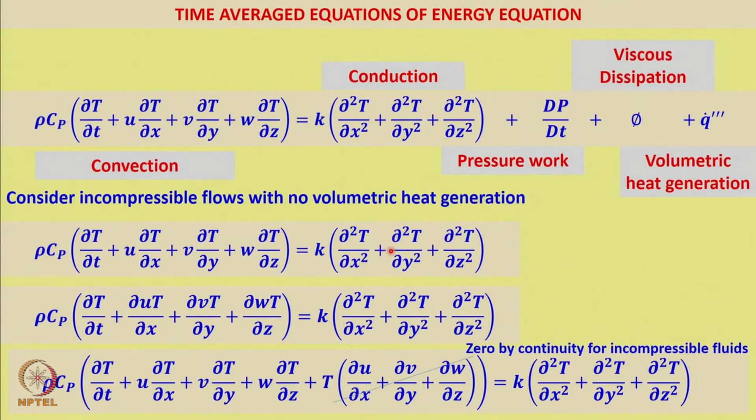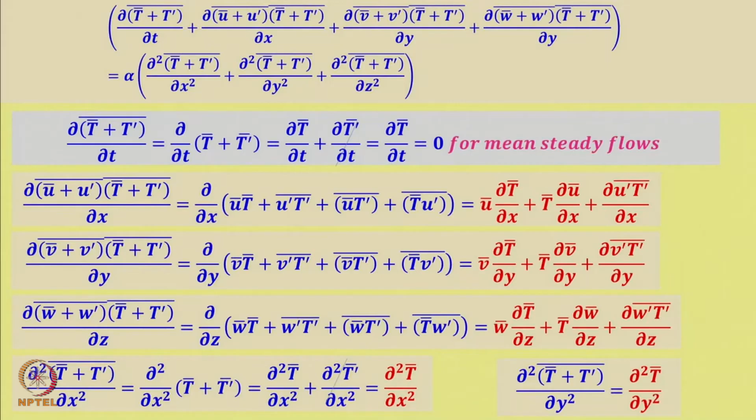Coming to the slides, this was the general energy equation, in which we neglected the pressure work, viscous dissipation, and volumetric generation. Pressure work and viscous dissipation were neglected because the flow was incompressible, and volumetric generation we have also neglected. We rearranged these terms, did the Reynolds averaging, followed various steps, took the components, decomposed them into mean motion and fluctuating component, and wrote all those equations, time averaging them to get these terms.

So when we time averaged, we ended up with these additional turbulent stresses. If I write all of these equations, we got 5 equations and 17 unknowns: u bar, v bar, w bar, p bar, t bar, and 12 more unknowns. So this we termed as a closure problem.

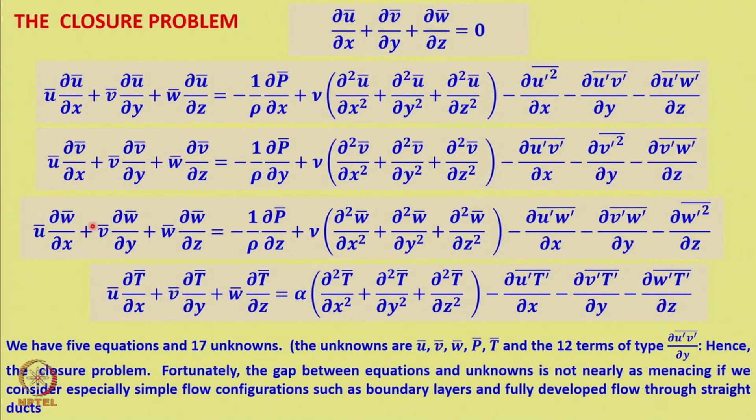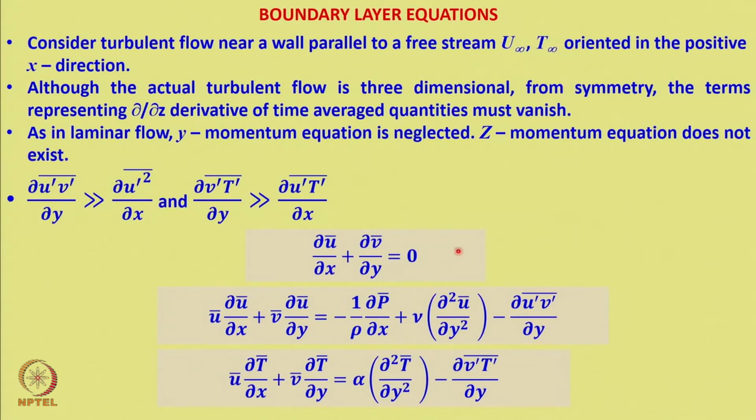To make our life a little easy, we took up boundary layer equations, that is, considering turbulent flow near a wall parallel to a free stream, u infinity comma t infinity oriented in the positive x direction. Although it is 3-dimensional, we have neglected del by del z derivative of the time averaged quantities, and the y momentum equation is neglected, and z momentum equation does not exist, and higher order terms are neglected, and we ended up with these 3 boundary layer equations.

We introduced here, rearranging these equations, the eddy shear stress as minus rho u prime v prime bar equal to rho epsilon m del u bar by del y, as if it is like nu. For laminar flow we wrote this as rho nu del u bar by del y. So we have written epsilon m, but note that epsilon m is dependent on the fluid flow but not on fluid properties. The eddy heat flux was defined as minus rho Cp v prime t prime bar equal to rho Cp epsilon h del t bar by del y.

So we rewrote this equation as u bar del u bar by del x plus v bar del u bar by del y equal to minus 1 by rho del p bar by del x plus del by del y of nu plus epsilon m del u bar by del y, and the energy equation as u bar del t bar by del x plus v bar del t bar by del y equal to del by del y of alpha plus epsilon h del t bar by del y.

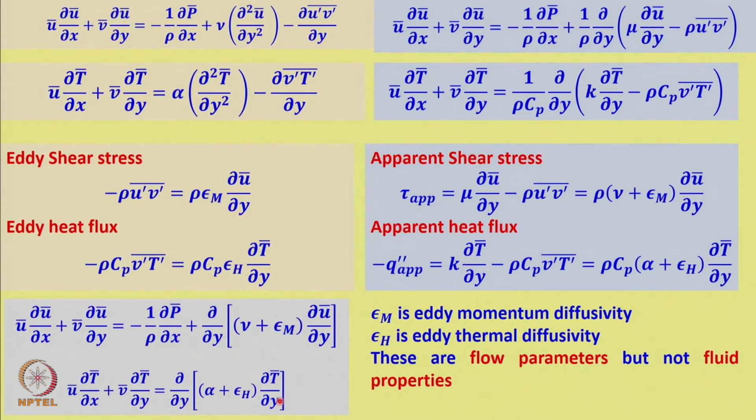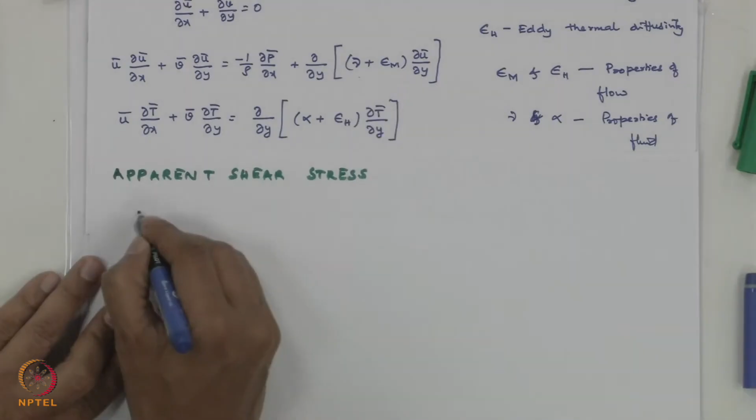I just want to remind you of this by rewriting the apparent shear stress. If you just see these equations, it's just the combination of both viscous and turbulent shear stress, that is, tau apparent is equal to mu del u bar by del y minus rho u prime v prime bar, which is equal to rho times nu plus epsilon m del u bar by del y.

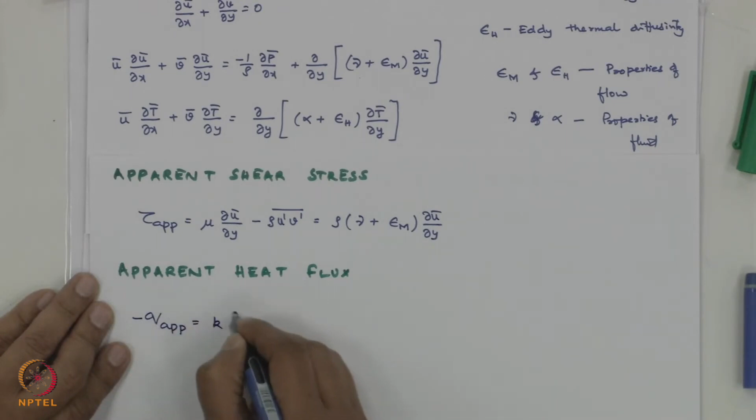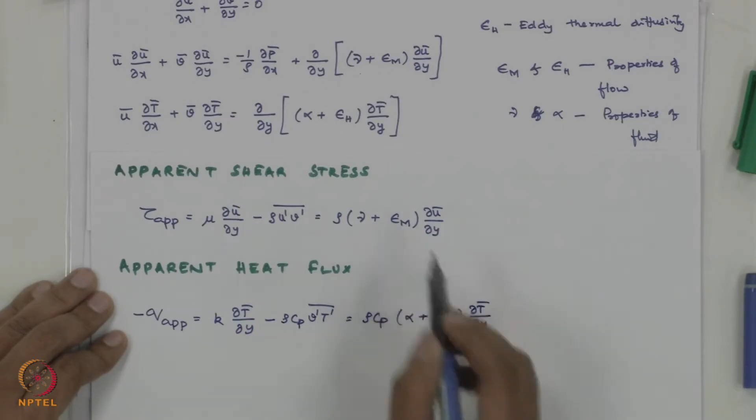Similarly, apparent heat flux, minus q apparent equal to k del t bar by del y minus rho Cp v prime t prime bar, equal to rho Cp times alpha plus epsilon h del t bar by del y. M represents momentum, H represents heat flux. That's how we have defined it, and this is how we can visualize it.

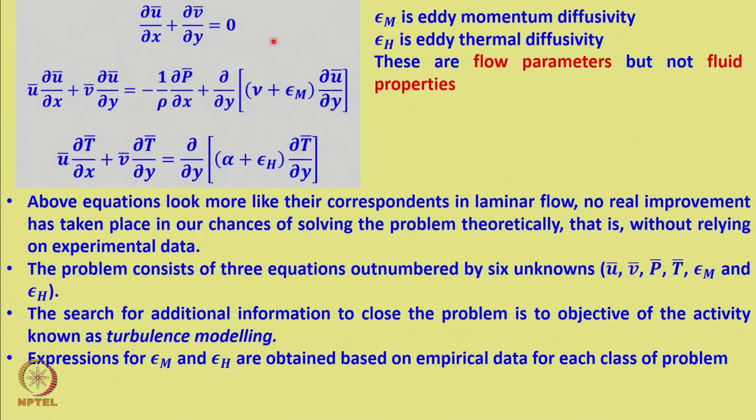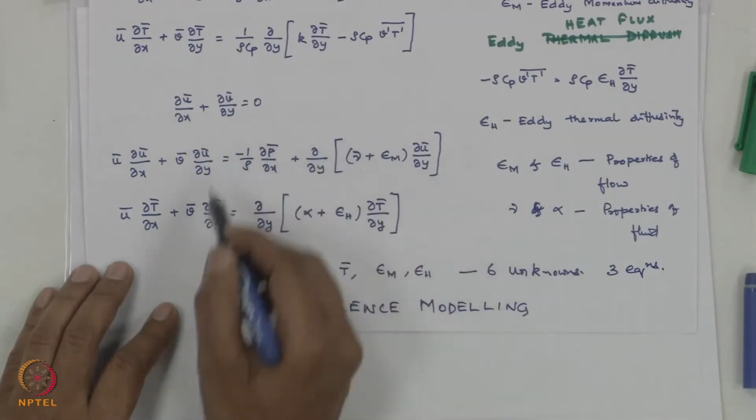So now if we get back to the slides, what are these slides saying? These are the 3 equations we have, as I said at the end of my last module. So you have unknowns u bar, v bar, p bar, t bar, epsilon m, epsilon h — that's 6 unknowns, but we have only 3 equations. So how to close this with these 3 equations? How to find equations for epsilon m, epsilon h is called turbulence modeling.

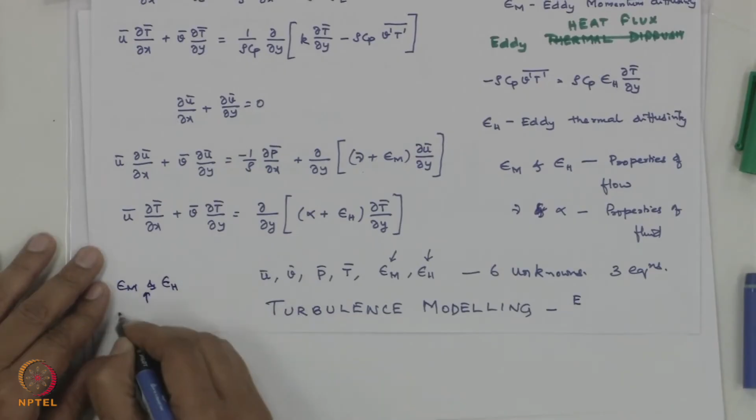That depends on each class of problem. Epsilon m and epsilon h will have different values depending on the class of the problem, that is, whether it is internal or external or jet flows — it depends on that.

So let us get back to writing. Let us take up what is called the universal velocity distribution.

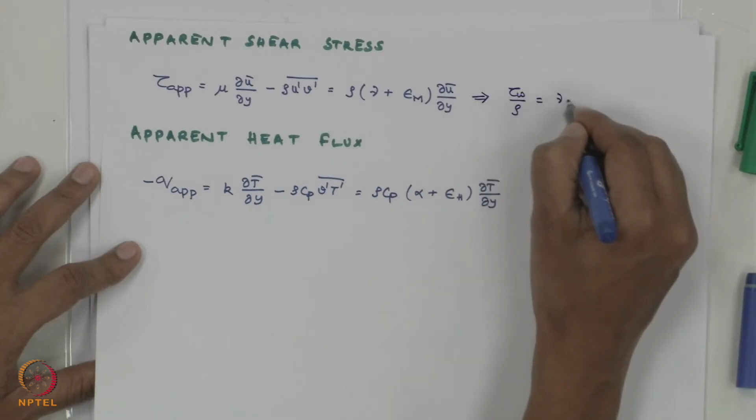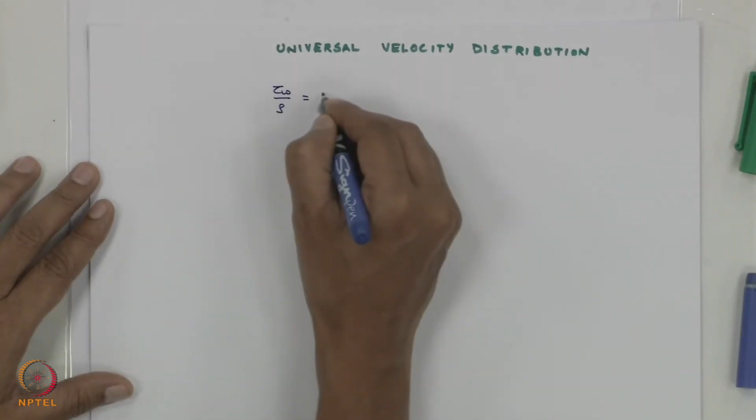Universal velocity distribution. So, this is what I had written: tau apparent equal to rho nu plus epsilon m del u bar by del y. I am replacing this, so tau wall by rho equal to nu plus epsilon m del u bar by del y. So I am writing that here: tau wall by rho equal to nu plus epsilon m del u bar by del y.

Now if you recollect, tau wall by rho has units Pascal per kg per meter cube, which is Newton per meter squared upon kg per meter cube. Newton can be written as kg meter per second squared into 1 by meter squared kg per meter cube, which reduces to meter squared per second squared. That means tau wall by rho is recognized as frictional velocity. Yesterday we called this u tau equal to square root of tau wall by rho, and this we called frictional velocity.

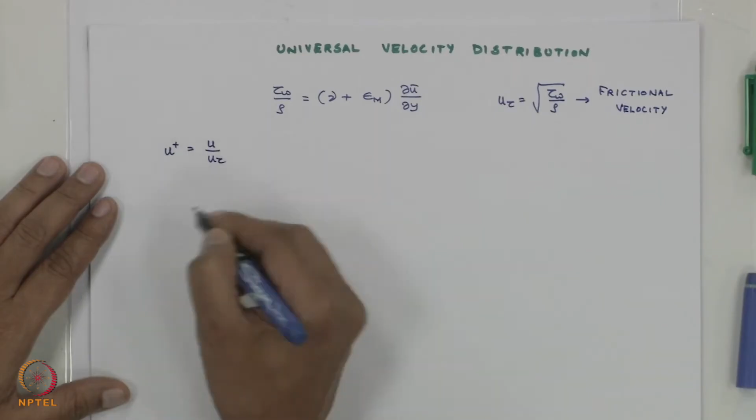Now I will rearrange this equation in terms of u plus and y plus, that is the aim. So let us recollect, u plus was written as u by u tau, and u tau equal to square root of tau wall by rho, and y plus equal to y u tau by nu. This is what we had written.

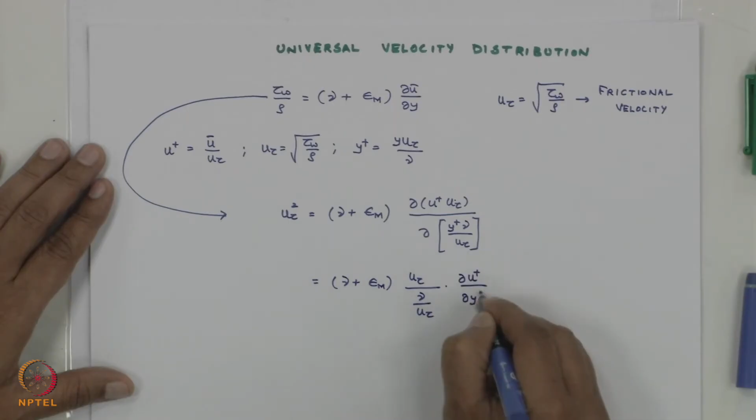So now left hand side of this equation becomes u tau squared, since tau wall by rho equal to u tau squared equal to nu plus epsilon m. For u bar, sorry, u plus is u bar by u tau, I had missed that bar. So u bar can be written as u plus into u tau, so del of u plus into u tau upon del of y can be written using y plus nu by u tau. But u tau and nu are constant, I can pull them out. So nu plus epsilon m into u tau by nu by u tau into del u plus by del y plus, and this is u tau squared.

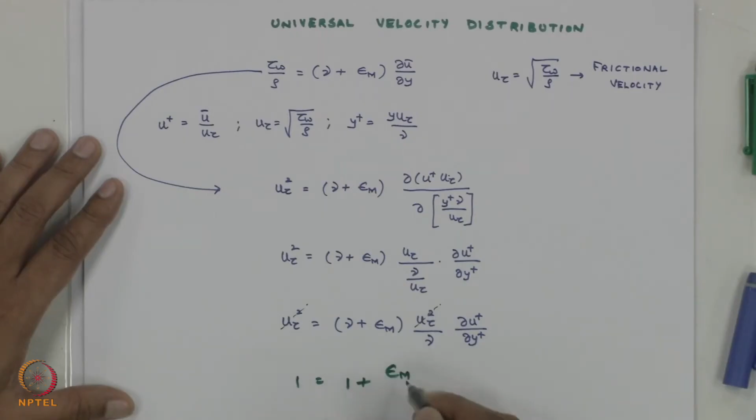So if I rewrite and rearrange, u tau squared equal to nu plus epsilon m, u tau squared by nu, del u plus by del y plus. The u tau squared cancels out on both sides, and if I divide by nu, left hand side becomes 1 equal to 1 plus epsilon m by nu, whole bracket into del u plus by del y plus. So this is my basic equation.

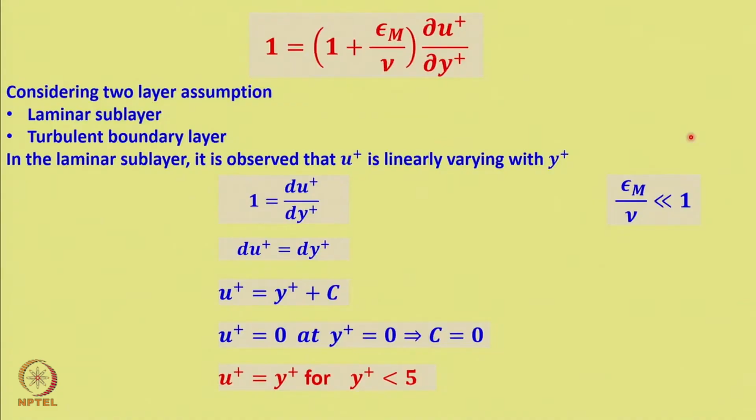So let us take up this equation and consider a two-layer assumption. In the two-layer assumption we have the laminar sublayer and the turbulent boundary layer. I will not consider the buffer layer here, I will take only these two layers: the laminar sublayer and the turbulent boundary layer.

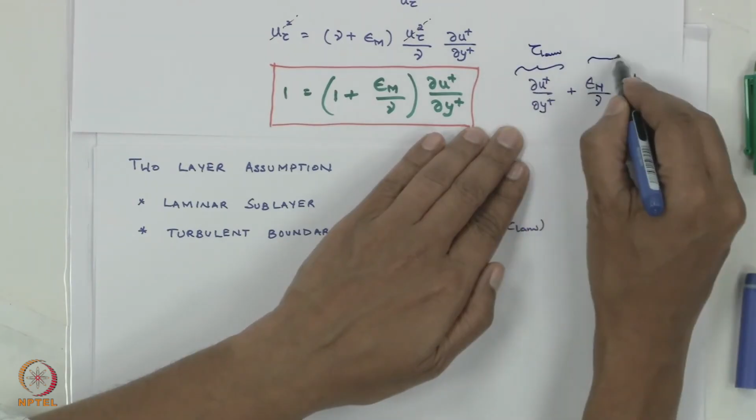So in the laminar sublayer, as you can recall, tau laminar exceeds tau turbulent, and in the turbulent boundary layer, tau turbulent exceeds tau laminar. So in this equation, 1 equal to del u plus by del y plus, plus epsilon m by nu del u plus by del y plus — the first term is tau laminar and the second is tau turbulent. So in the viscous sublayer I can neglect this turbulent component, since tau laminar is greater than tau turbulent, which implies 1 is equal to du plus by dy plus.

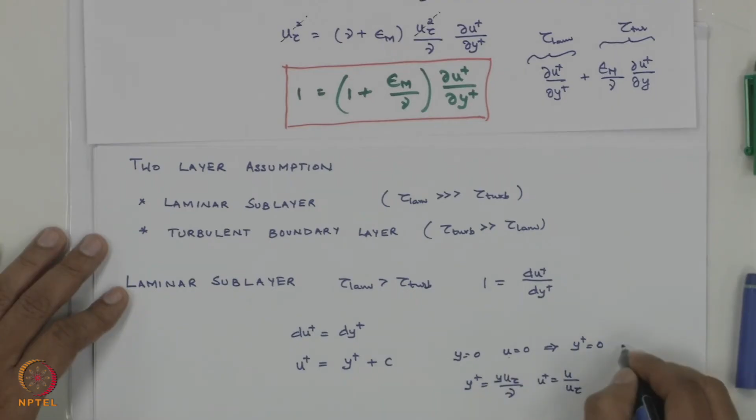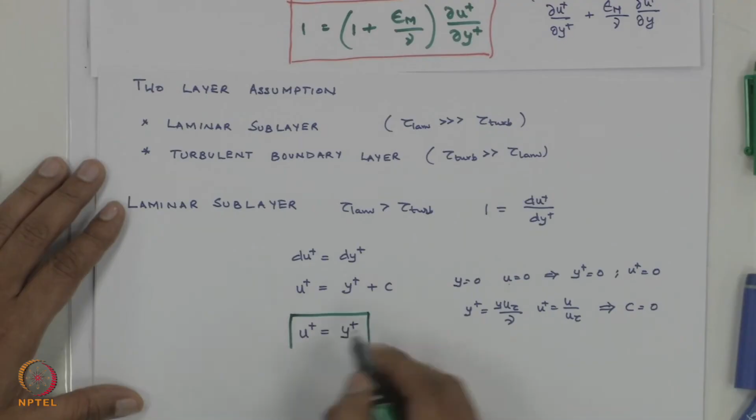So if I write this as du plus equal to dy plus and integrate, u plus equal to y plus plus c. But we know that at y equal to 0, u equal to 0, which implies at y plus equal to 0 — since y plus is y u tau by nu and u plus is u by u tau — when y is 0, y plus is 0, and when u is 0, u plus is 0. So u plus is equal to 0, which implies c equal to 0. So you get u plus equal to y plus, this is what we had written yesterday, u plus equal to y plus for the laminar sublayer.

Now, let us take up the turbulent boundary layer.

If I take up the turbulent boundary layer, recall we had written 1 plus epsilon m by nu du plus by dy plus. This was the laminar shear stress and this is the turbulent shear stress. In the turbulent boundary layer, turbulent shear stress far exceeds the laminar shear stress, so I can neglect laminar shear stress and take only epsilon m by nu into du plus by dy plus.

So in the turbulent boundary layer, I can write tau turbulent is greater than tau laminar, which implies that epsilon m by nu du plus by dy plus is equal to 1. Now I need to invoke what is called Prandtl's mixing length.

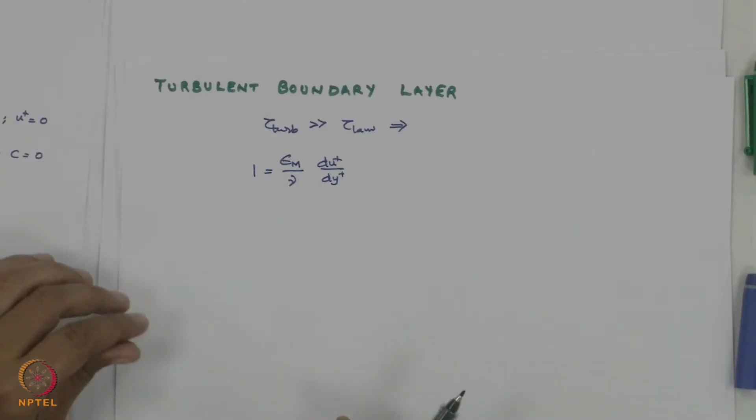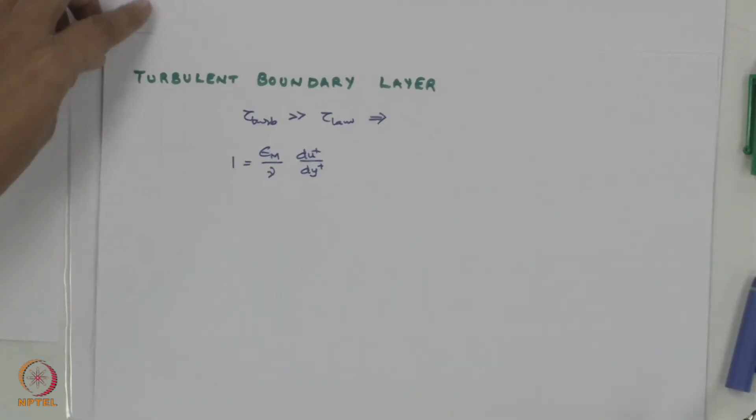I need to substitute the relation for epsilon m. I will explain Prandtl's mixing length a little later, but first let me take from Prandtl's mixing length hypothesis or theory the relation: epsilon m equal to kappa squared y squared du bar by dy, mod. This is the relation which Prandtl proposed for epsilon m.

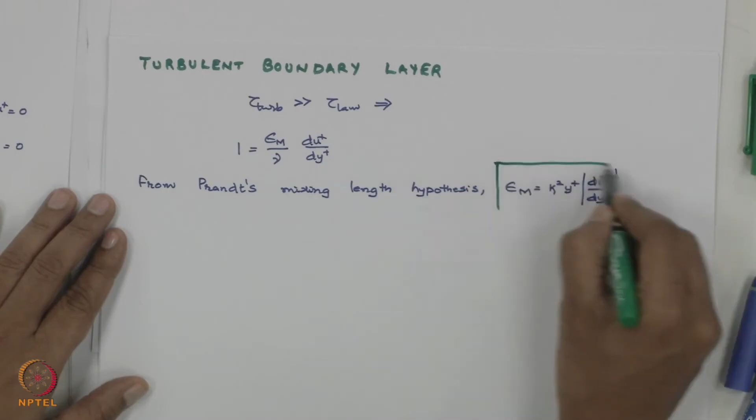How this has come, I will explain a little later in this module, but let us take this value. Before I substitute this here, I have to convert epsilon m, kappa squared y squared du bar by dy, converting y and u in terms of pluses before substituting in equation 1.

So I recall y plus equal to y u tau by nu and u plus equal to u bar by u tau. This implies epsilon m equal to kappa squared, y squared can be written as y plus squared nu squared upon u tau squared, and du bar can be written as u tau du plus upon dy plus, y can be written as y plus nu upon u tau. This we have done earlier, so I have done it a little fast.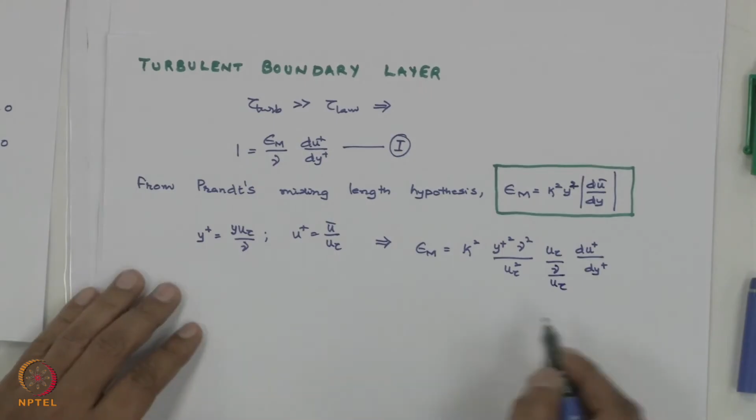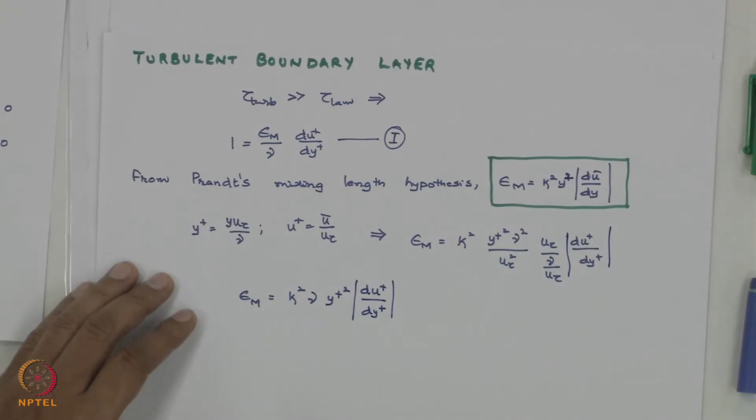So epsilon m is equal to kappa squared, and here you see u tau squared gets cancelled out. So nu squared by nu gives you nu, into y plus squared into du plus by dy plus within the mod. Here I forgot to write the mod. So this is the relation for epsilon m.

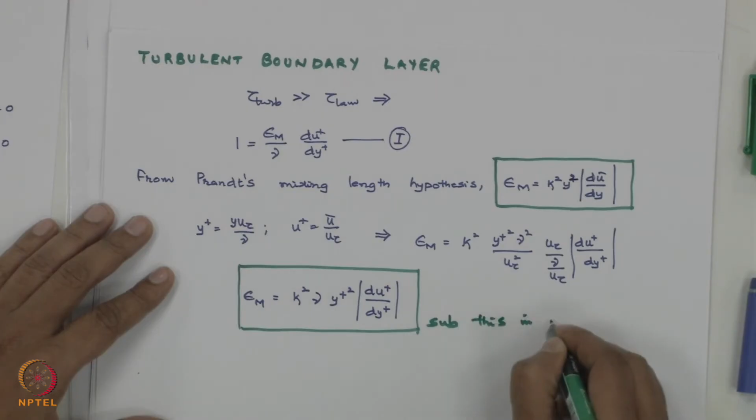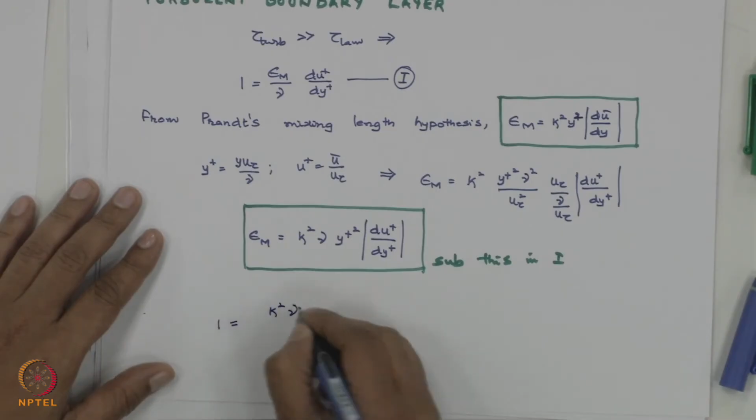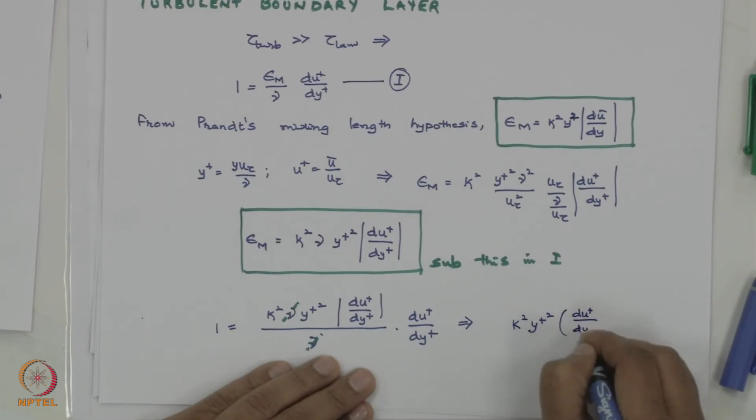Substituting this in equation 1, what do I get? I get 1 equal to kappa squared nu y plus squared into du plus by dy plus mod, upon nu into du plus by dy plus. As you can see, nu and nu get cancelled out, so you get kappa squared y plus squared, du plus by dy plus whole squared, equal to 1.

If I take the square root of this, I am going to get kappa y plus du plus by dy plus is equal to 1. If I rearrange this, because I am looking for du plus equal to 1 upon kappa, dy plus by y plus, I can now integrate this equation.

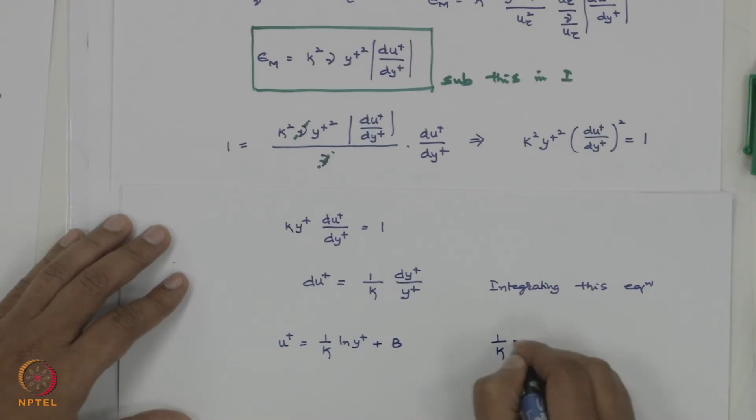Integrating this equation, I get u plus equal to 1 by kappa log of y plus, plus b, and let me call this 1 by kappa as a. So that is u plus equal to a log of y plus plus b. This is my equation, but who gives me a and b?

A and b come from experiments. So this is what is called the law of the wall. Law of the wall, and if you compare with the experimental data, A equal to 2.5 and B equal to 5.5.

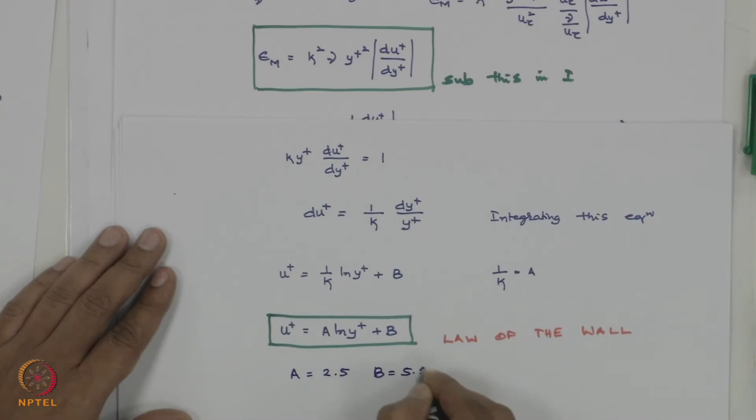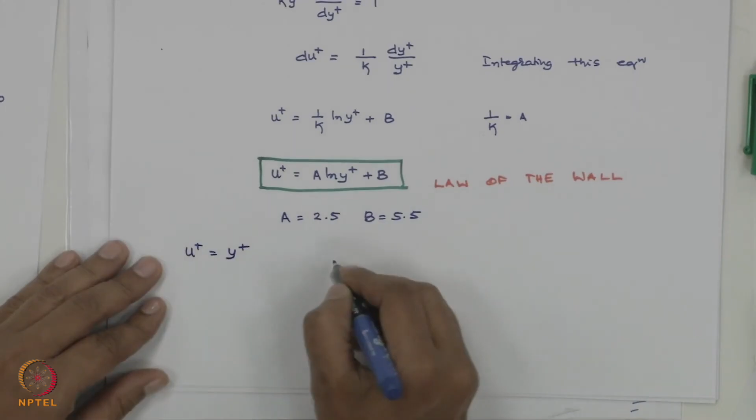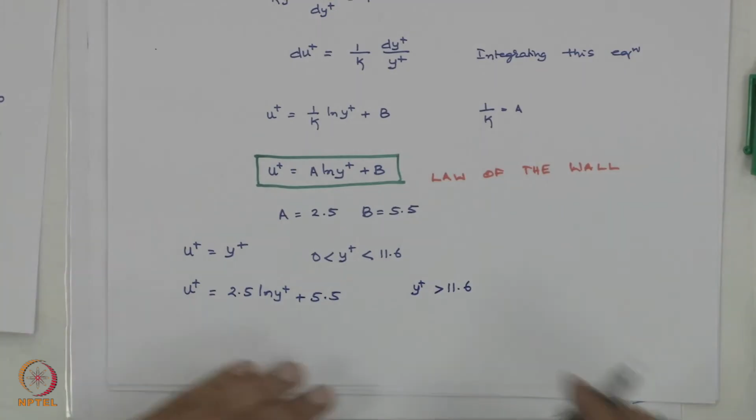So these results, we started with two layers. What were those two layers? u plus equal to y plus for all y plus less than 11.6, that is between 0 to 11.6, and u plus equal to 2.5 log of y plus plus 5.5 for y plus greater than 11.6. This two-layer structure was proposed by Prandtl and Taylor, and this is what is called the two-layer model.

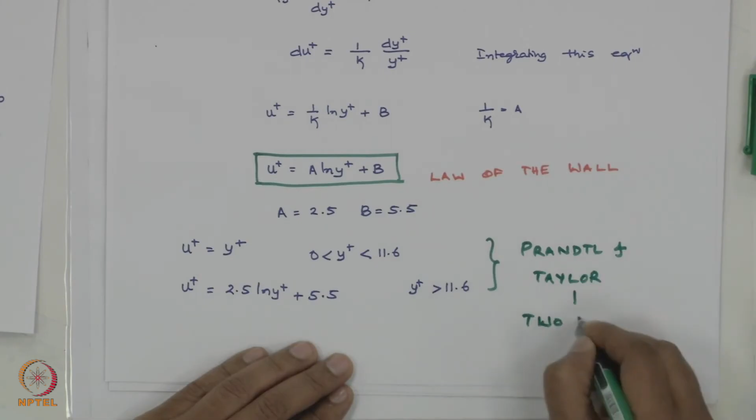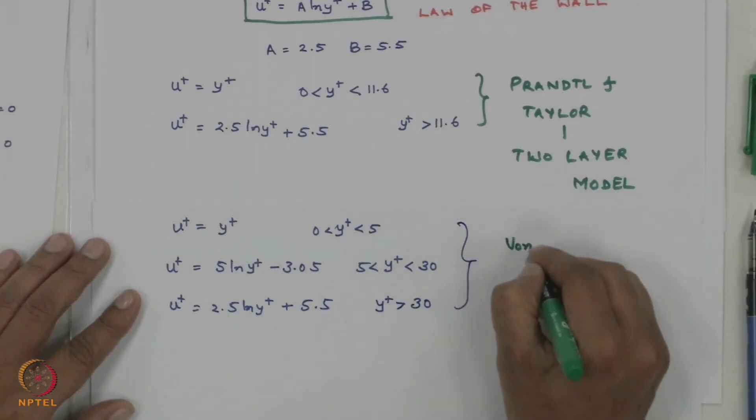Now the next, the three-layer model. This was refined by von Karman, who gave the three-layer model, which I taught you in previous modules: u plus equal to y plus for y plus between 0 to 5, and u plus equal to 5 log y plus minus 3.05 for y plus between 5 to 30, which is the buffer layer, and u plus equal to 2.5 log of y plus plus 5.5 for y plus greater than 30. This was given by von Karman, and this is the three-layer model.

So if I get back to my slides and compare these models with the experimental results, this shows u plus versus y plus. You see in the three-layer model, all these dots are experimental data, so you have three different lines. The first line is the viscous sublayer, the second is the buffer layer, and the third is the turbulent layer.

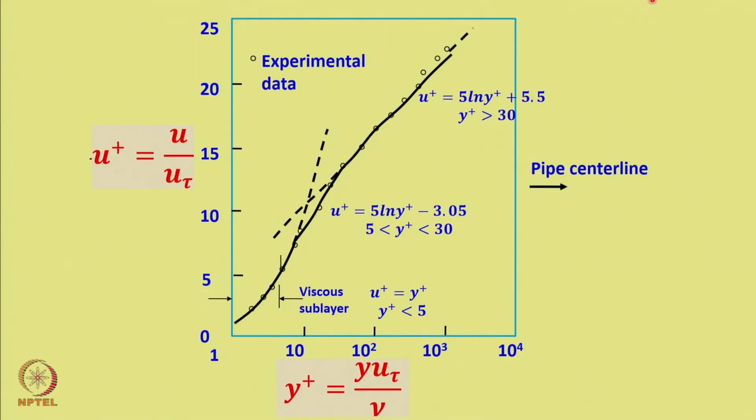Yes, so the coefficients are slightly off, there is a typo mistake here. This is u plus equal to 2.5 log of y plus 5.5. While copy pasting, I made this mistake, please correct yourself. What I have written here, or shown in the slides, is the correct one. In the graph, there is a typographic mistake.

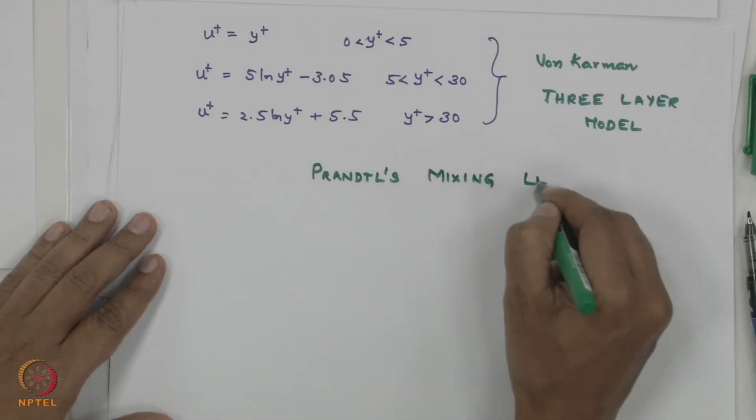So now the last one is the Prandtl's mixing length hypothesis, which is what I had explained, let us take up Prandtl's mixing length hypothesis.

So to the slides, I am just considering a shear flow, and you have the velocity profile here. You can have either v prime positive, that is a fluid particle moving from location y to an upper location, but it has moved by a distance of length L, or the fluid particle might have moved from top to bottom, which will induce v prime less than 0, then in that case u prime is greater than 0 and it has moved by a length L.

So the order of magnitude of epsilon m can be discussed from the following scaling argument, proposed by Prandtl. In the boundary layer, imagine a ball of fluid that at some point in time is situated at a distance y, where the mean longitudinal velocity is u bar of y.

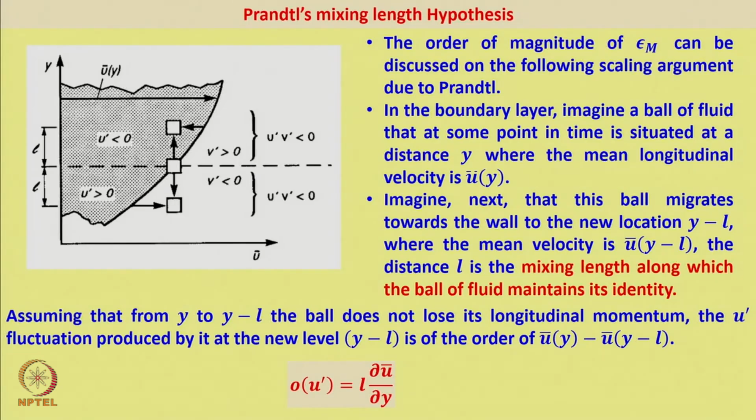Imagine next that this ball migrates towards the wall to a new location y minus L. There it would be u bar of y minus L, that is the mix. So what is L? L is the mixing length

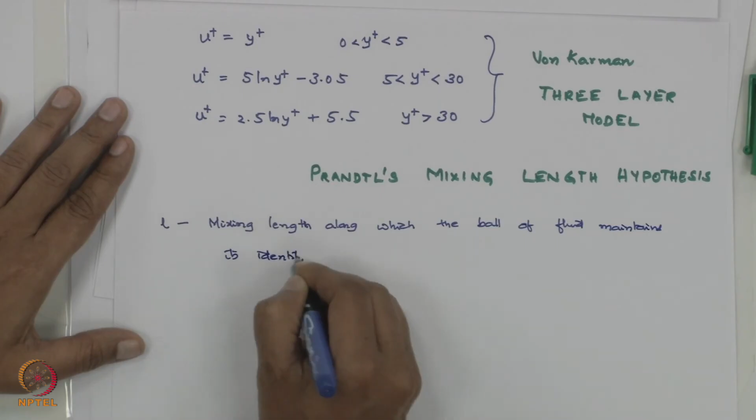along which the ball of fluid maintains its identity. If you recall my video yesterday, in the previous modules, I had told that the eddy size, you can think that L is kind of an eddy, how long it is getting retained.

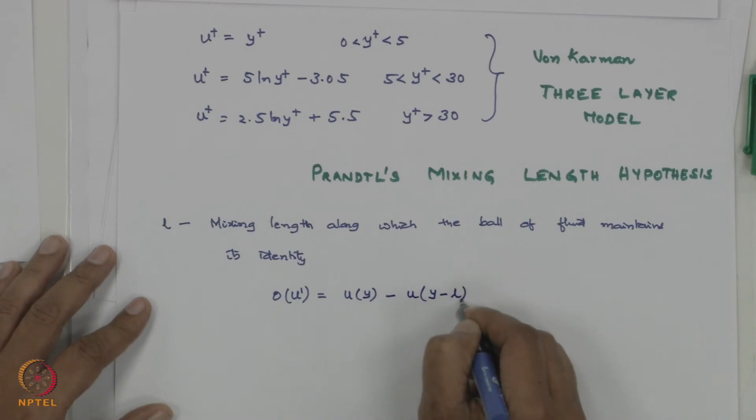So if you see, the order of u prime is velocity at y minus velocity at y minus L. So this is nothing but u of y minus u of y minus L, which equals L times del u bar by del y.

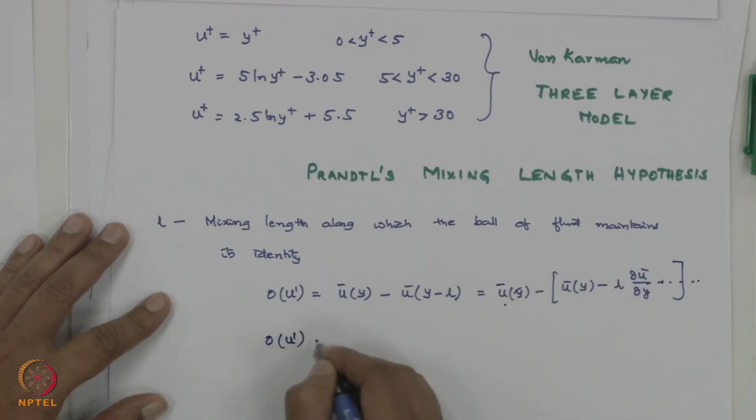This is just by Taylor's series expansion. I have neglected the higher order terms, so this and this get cancelled out, and you get the order of u prime as L del u bar by del y.

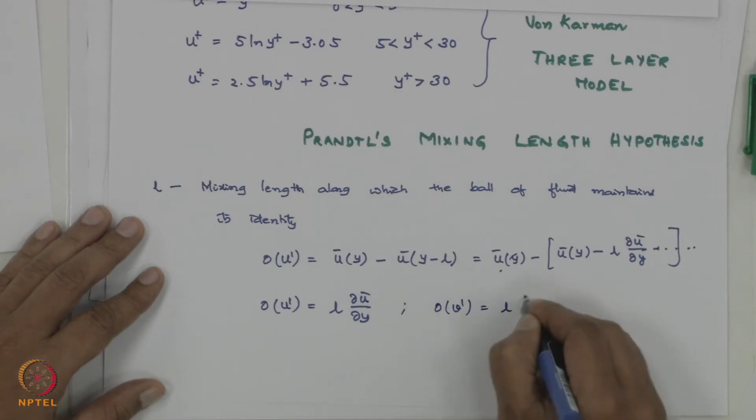Similarly, you can argue out that the order of v prime is also of the same order, L del u bar by del y. So minus u prime v prime bar will have the order of L squared times del u bar by del y whole squared.

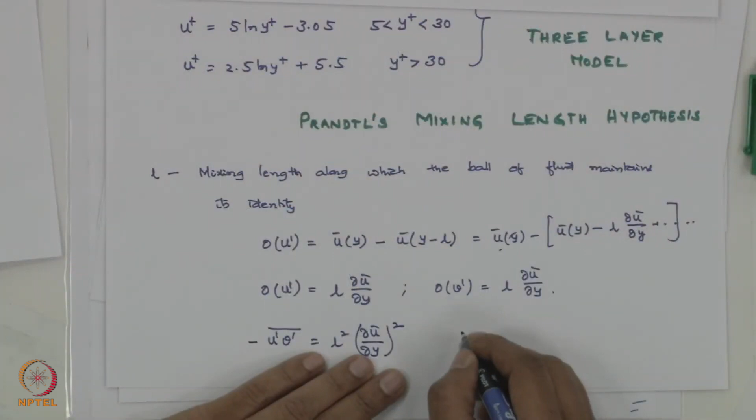So now if you recall epsilon m, what is epsilon m? Epsilon m, minus rho u prime v prime bar is equal to epsilon m del u bar by del y. This is what we had taken.

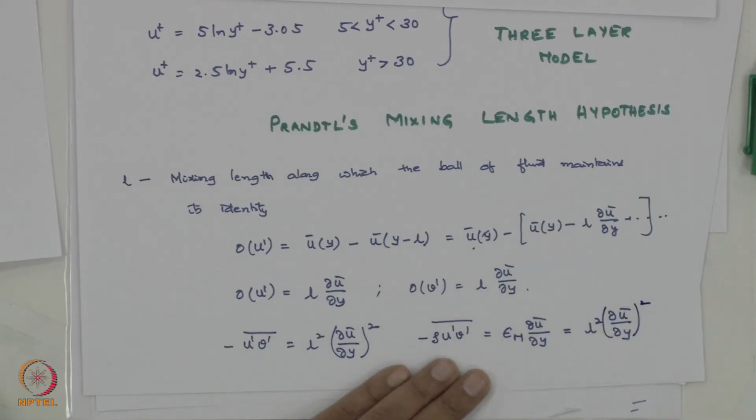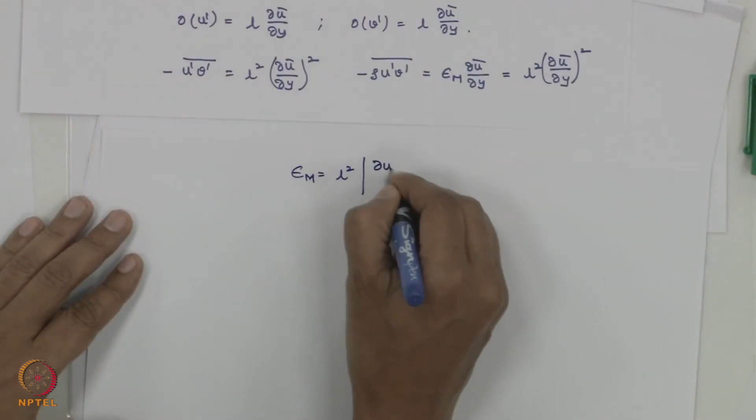So this should be equal to L squared del u bar by del y whole squared. So you get the order, that is the value of epsilon m is equal to L squared del u bar by del y. I have taken the mod because negative signs and all are taken care of.

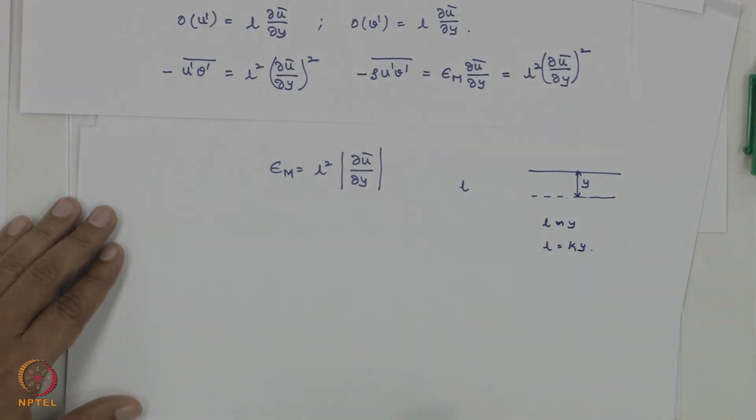But now what should be the scale of L? If you take the pipe, it can be of the order of the complete y. So L is of the order of y, meaning L is equal to some constant into y, kappa. So I write this as kappa squared y squared del u bar by del y.

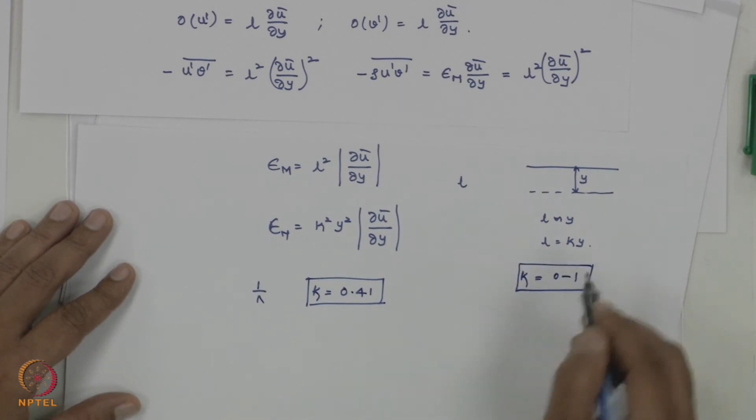If you recall, 1 by kappa was my value A. So kappa comes to approximately 0.4 or 0.41, which says that kappa is of the order of 0 to 1. So kappa has a value between 0 to 1, and the value of kappa is 0.41.

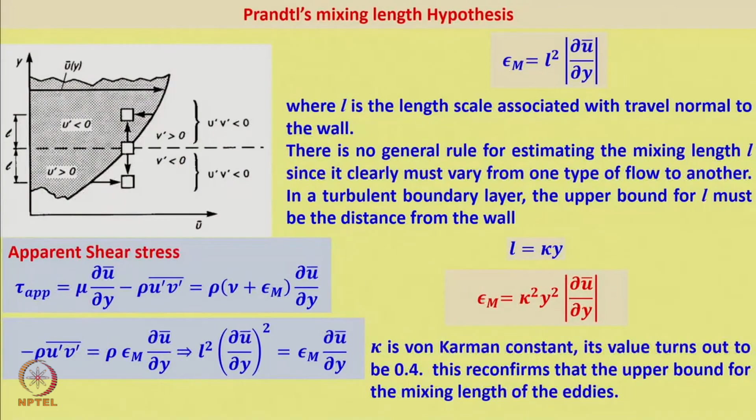So this is what is the Prandtl's mixing length hypothesis. If I come to the slide, you can see that epsilon m equal to kappa squared y squared del u bar by del y. This brings us the closure of turbulence averaging and the Reynolds shear stresses using Prandtl's mixing length theory.

But in the next module we will see how, using this universal velocity profile, we can derive the friction factor for smooth pipes and rough pipes. Thank you.